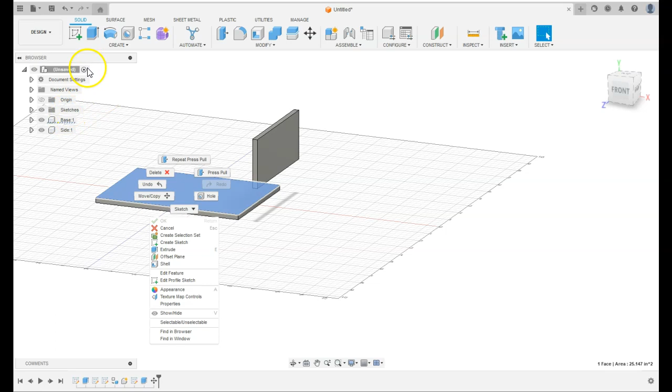Now, one thing to remember when working with joints is that it's important to have grounded one of the pieces. If neither piece is grounded, it gets very problematic for the system to make sense of what's going on. So before adding a joint, we're going to right click on the base. If I right click on the base in the picture, it gives me this menu that doesn't show ground. But if I'm still at the top level and right click on the description of base, click off, then right click on base, it shows the ground option. If I hit ground, that effectively makes it so it doesn't move, and when we create the joints, the other part will move to it.

This should bring back some memories for when you assembled the selfie stick, where you had one of the pieces grounded.

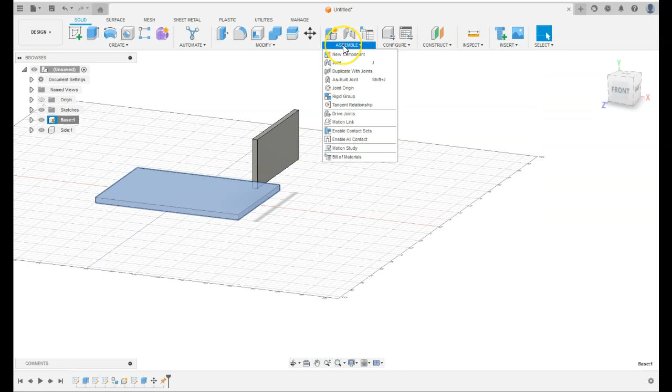Now we're going to go to assemble and joint. I can get there from the toolbar and click joint, or hit assembly, down, joint. That brings up this option here, so I have some things I can do.

If I choose the first option, remember it's going to create a joint based on what it's showing you here, which I've heard called a chip. Looking at this chip that's described, it's showing red, which based on the view cube is the x-axis. Green is the y-axis going up, and Z is going to the left and out of the picture. So the joint, as it's being created, shows the same orientation as the view cube is currently positioned in.

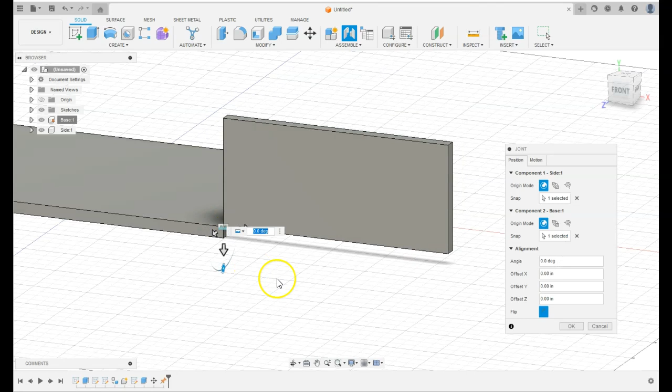If I click there, then go down to option 2 and look down here, depending on how I arrive at that joint, I can get different orientations. If I'm in this position, blue, instead of going to the left, is actually going to the right. So I want to make sure the orientation matches the orientation in the part, if that's how I want these things joined. It's basically going to join them together in that orientation. For example, this is going to mess up - the blue, instead of being out to the left, is out to the right. So if I click yes, it's going to do this, not in the proper orientation.

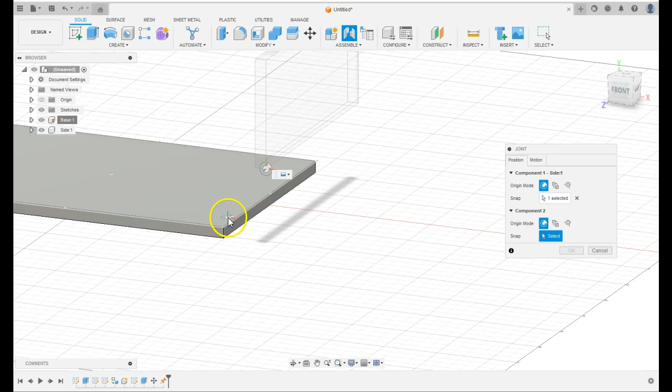So I'm going to undo that and redo it. I'm going to click joint again, pick here where it's in the same orientation as the view cube - Y is up, X is to the right, Z is out. Then I'm going to come down here and do the same - red is to the right, Z is to the left, green is up - and it's going to locate that in the right orientation. So when I put that in place, I can do all kinds of things.

I can offset it in the X. Let's say I wanted to leave a small seam to the right. If I look at offset X and wanted to move it, I could make it negative, say negative 0.1 inches, and that would offset it so I could leave whatever ledge or edge I wanted. As you play with these positions, you can change the X position, the Y position, the Z position from an offset however you want.

I can also change the angle - if I change this guy here, I can change that as well. So even when I create the joint, I have some options. In addition, I can change the type of joint. Our assumption is we want it rigid, which is what's built in by default.

If I choose others - remember, revolute rotates around a joint origin, slider slides it along, cylindrical goes around and also slides, pin and slot rotates and slides a component on two different axes, planar basically moves it about a face, and finally a ball joint allows it to rotate around a center point.

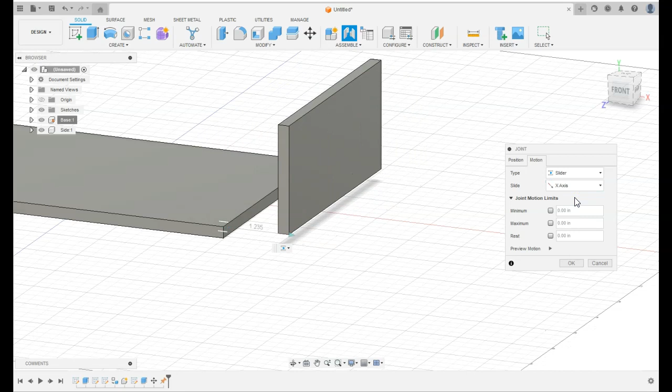If you wanted to preview these, let's say slider, you could change it. In this case it's showing it sliding along the z-axis. Let's say we wanted to change that and make it slide along the x-axis instead. In the same way, I can also set minimums and maximums in order to have it go in the range of motion that we want. Right now we're having it slide along the x-axis.

Let's say this is as far out as we wanted it to go, but then we wanted it to go, let's see here - let's see if it actually goes what we want. Yep, so now we've set those - we could do a slider and limit the minimum and maximum. You can also set the rest position where it goes back to as a default.

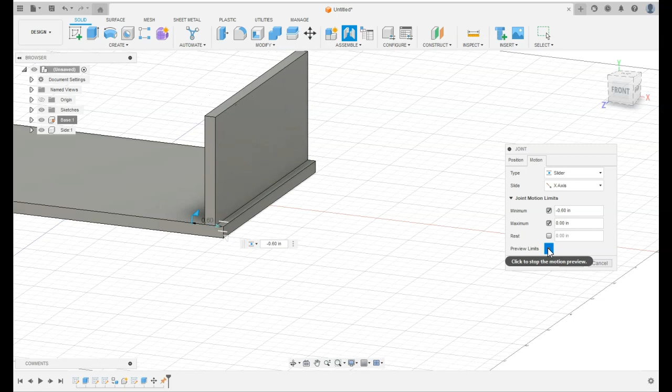So what I want you to do is create that base, create the side, create the joint as we've prescribed it, and then create this slider mechanism with it sliding along the x-axis and roughly these min and max values. You should have on your screen something that looks mostly like what I have. It can be different, but I want to know you went through the exercise. Hopefully that brings back some memories about that selfie stick assembly we created.